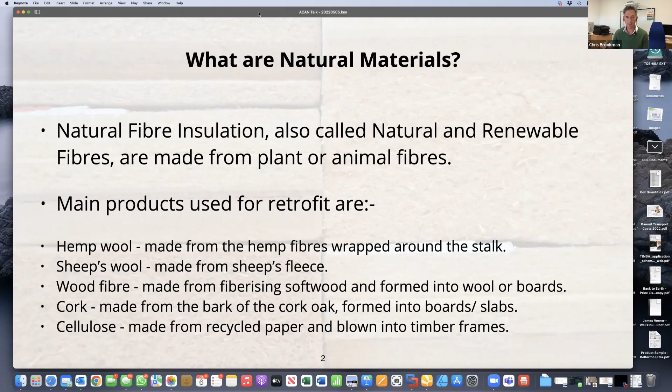The other one is cork, which is quite popular, made from the bark of the cork oak. The last one you'll see fairly commonly is cellulose, made from recycled paper. So again, speaking to the converted slightly - why would you bother retrofitting insulation to your building? It is relatively expensive.

It produces quite a lot of disturbance, so you really do need to be motivated to do it. But basically in solid wall buildings, whether they're brick or stone or whatever, they're just generally cold. So at 11.5 months of the year, they are largely uncomfortable to be in. There are periods in the summer when they're actually really rather nice to be in, because it can be quite hot outside. But beyond that, most of the year it tends to be that they're rather uncomfortable.

Now, everything that we do inside homes produces moisture. So breathing, washing, cooking, showering, everything produces a lot of moisture. And when you've got cold masonry surfaces around you, you get condensation, and that condensation on a continuous level begins to form mold. The mold produces spores which go into the air, and that gets into your lungs and can have fairly serious impact on your health.

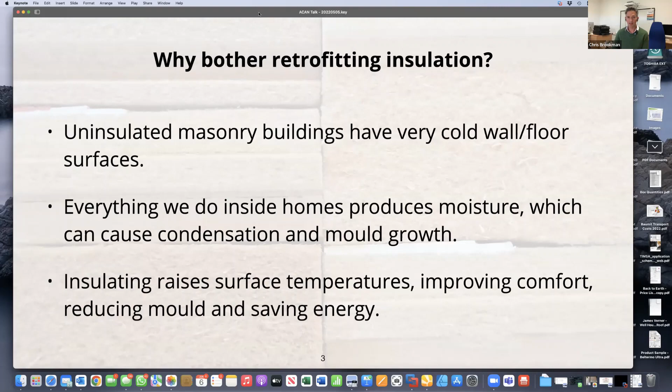So to alleviate that, you can apply a layer of insulation either on the outside or the inside, but I am primarily going to talk about internal insulation. By doing that, you're raising the surface temperature of your walls, or whichever surface it is you're insulating. That prevents mold growing because the temperature is higher and the surface is drier. And then obviously by insulating, you're saving energy as well. So there's a lot to do with comfort, health, and energy saving. Although the energy saving possibly is the most difficult sell, because the payback period on a lot of this stuff tends to be fairly long.

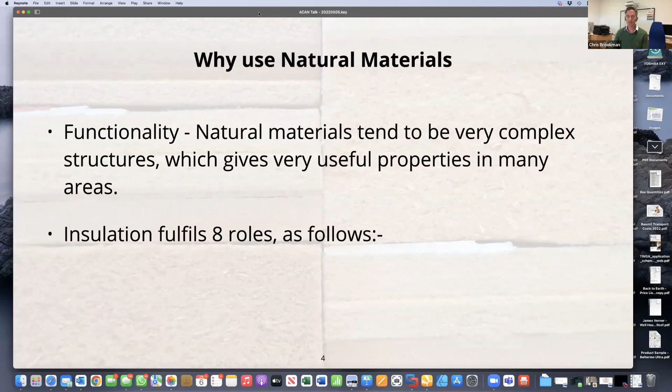So with all that said, why would you specifically use natural materials? Well, in plants, a lot of these fibers are transporting moisture. They're absorbing and releasing water and other nutrients. So they tend to be incredibly complex structures, and it gives them incredible properties that are really, really useful in insulation, particularly when you're insulating up against masonry.

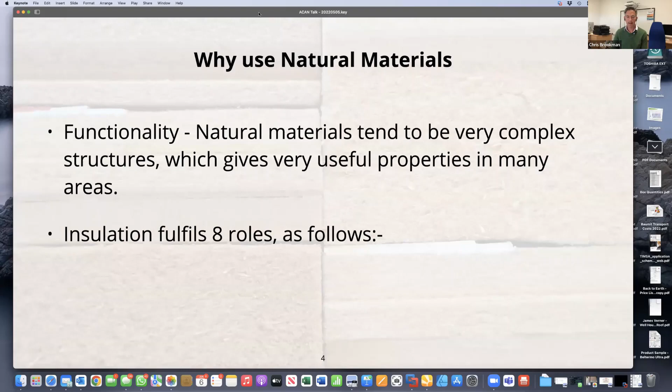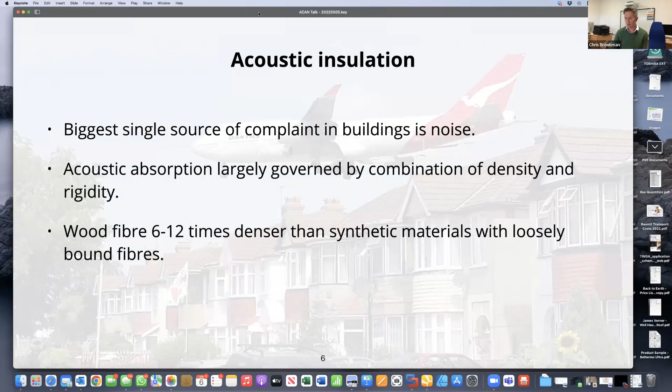I'm just going to very quickly whip through the different roles that insulation fulfills, and explain why these sort of products do particularly well. Starting with acoustic insulation, it's one of the largely forgotten ones, certainly in a lot of new build properties. Because these fibers are very dense, they tend to absorb sound extremely well, and typically would be about 6 to 12 times better at absorbing sound than the equivalent synthetic fibers. So they're extremely capable at doing that.

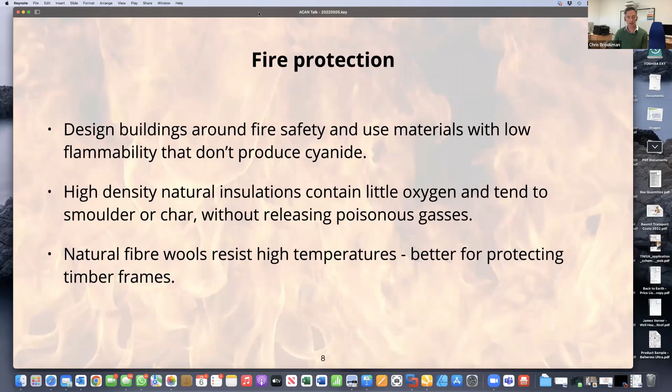Fire is obviously a pretty big topic. The nice thing about these fibers is they will very slowly burn in a fire, but what tends to happen is the surface chars and they burn very, very slowly. They also don't release cyanide or hydrogen chloride gas, both of which are pretty likely to kill you before you get out of the building. So although these materials will slowly burn in a fire, they're not going to kill you before they let you out of the building, which is actually arguably better than the alternative.

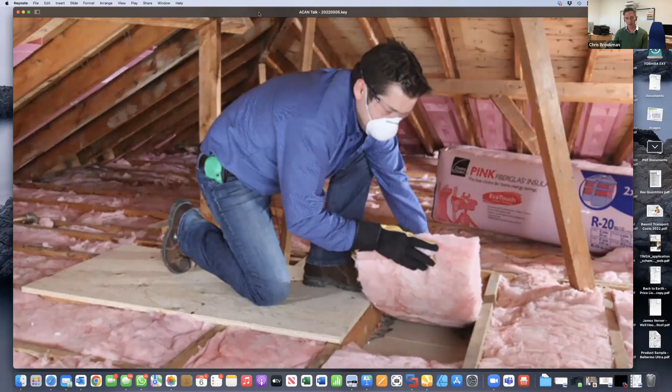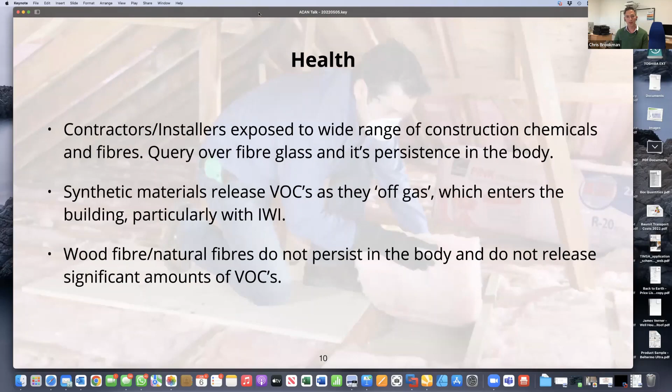Health of occupants and installers: a lot of synthetic materials contain lots of different chemicals, binders and other materials that were used to actually produce the product. They off-gas and release a lot of volatile organic compounds when they're in situ, but also they expose the installers to a whole range of chemicals and particulates like glass fibers or mineral fibers. And there are impacts to getting these kind of products in your body. So, they're basically not particularly good for you.

Comfort: again, natural fibers tend to be very, very slow at changing temperature. So you can get very lightweight insulation and it'll insulate the building and give you this incredibly low U value on paper. But in practice, they tend to create buildings which change temperature very quickly and aren't particularly comfortable. Whereas the natural fibers are very slow to change temperature, and that gives you a much greater level of comfort.

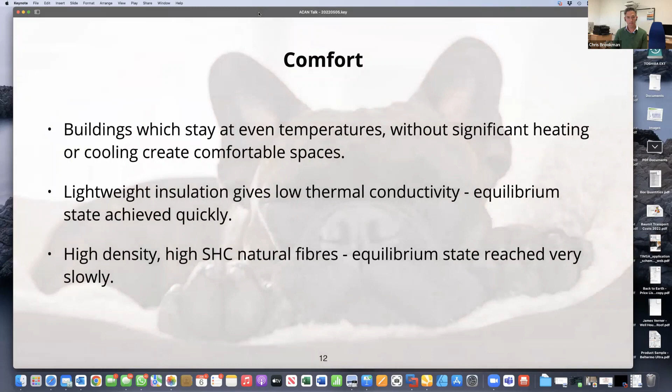This is not something you want your builder to be doing. So in terms of buildability, again, with natural fibers, they tend to be very simple. The detailing is extremely simple. You don't get shrinkage, you don't get off-gassing and changes in the structure and slumping and all these kind of issues that have dogged synthetic materials for some time. And again, you don't get this big difference in what's called the performance gap - the difference between the design energy consumption and the in-use energy consumption. That really is a big issue currently for a lot of modern buildings.

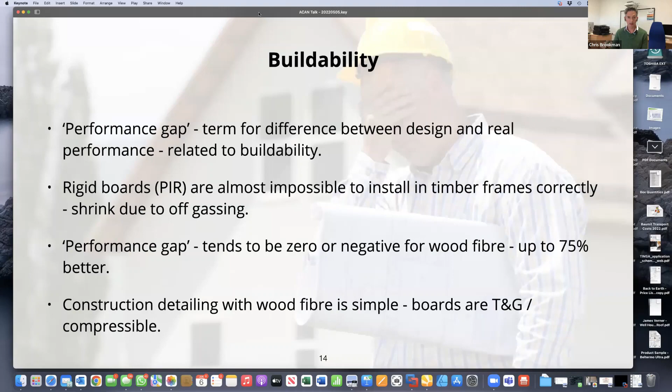Durability: anyone who's ever built anything will know that it rains a lot in England, and anything you put up tends to get soaking wet, even though it may well have started off lovely and dry. Again, these fibers are fantastic at soaking up moisture, transporting it, and letting it evaporate out quicker than pretty much anything else. So whilst you may think on the surface that they're going to rot or fall apart, they're actually incredibly useful in construction because they do allow buildings to dry out. So many buildings do contain vapor barriers or barriers to moisture movement, which actually massively impedes their drying out.

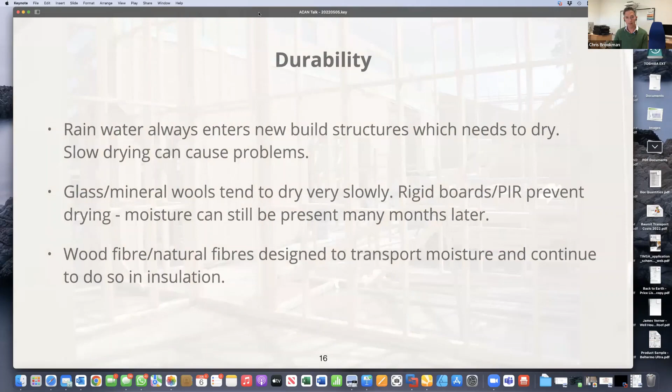Sustainability. As I said earlier, these are largely waste materials. The great thing about them is that they are absorbing carbon as they're growing, so by using these kind of products, you're actually locking up CO2 into your building and reducing the carbon in the air right now. Things like Passive House are a great standard, but only if you're using low embodied energy materials, because if you build a Passive House out of concrete, steel and polystyrene, the amount of energy it's producing takes a hell of a long time to offset against the running of the building. So it's really important that you use very low carbon or carbon negative materials like these.

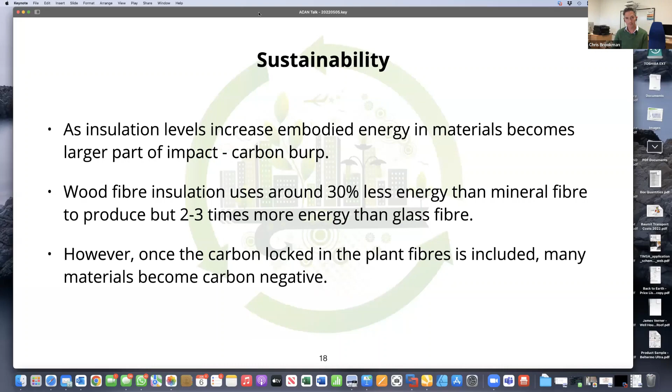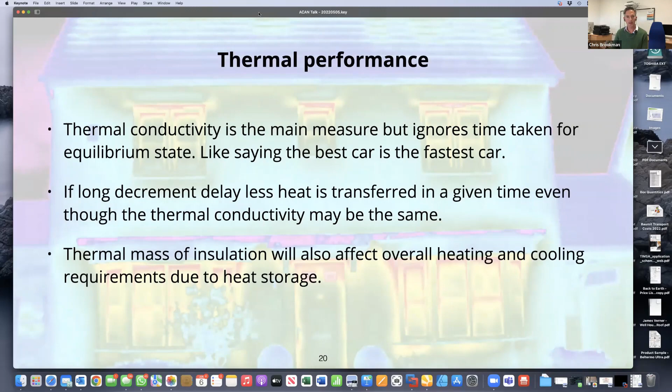And then finally, thermal performance. Again, overall heat loss is not just a measure of how low the conductivity of the insulation is. Very low conductivity insulation doesn't guarantee very low heat loss. Overall heat loss is affected by other parameters, including the speed that heat moves through an insulation material. Natural fibers tend to take a long time to change temperature, and it takes a long time for heat to move through them, even though their conductivity, once they reach equilibrium, may not be as good as PIR, for example.

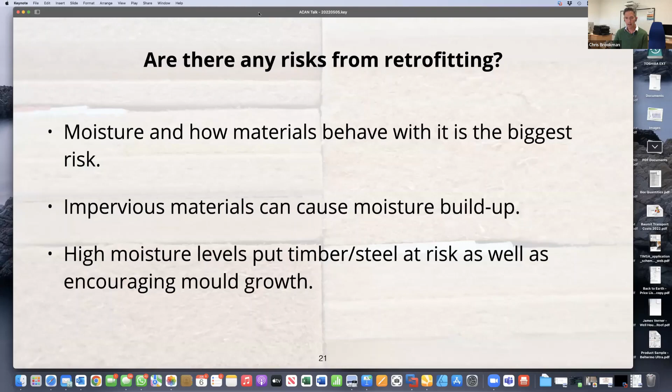So are there risks from retrofitting? Yes, there are, and it's largely around moisture. The materials you use have got to be able to accommodate moisture flow. Using impervious materials, particularly against historic buildings, causes the slow rise of moisture in the walls. And particularly when you've got timber, which nearly all historic buildings have in the walls, joists, beams, lintels, wall plates, whatever, if you raise the moisture content of the wall, you inevitably begin to rot the timber bedded in it. So it's really important to use vapor permeable materials, but also materials that are hygroscopic and can transport moisture as well.

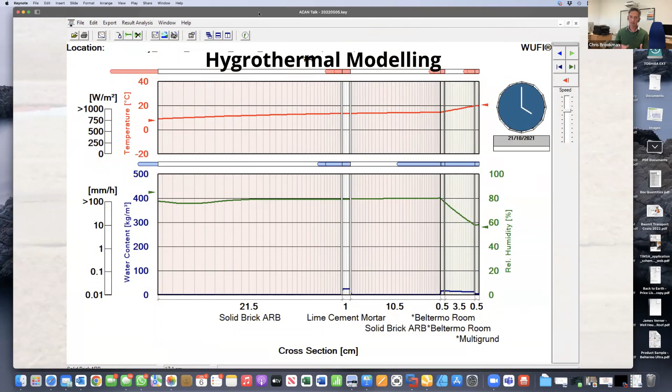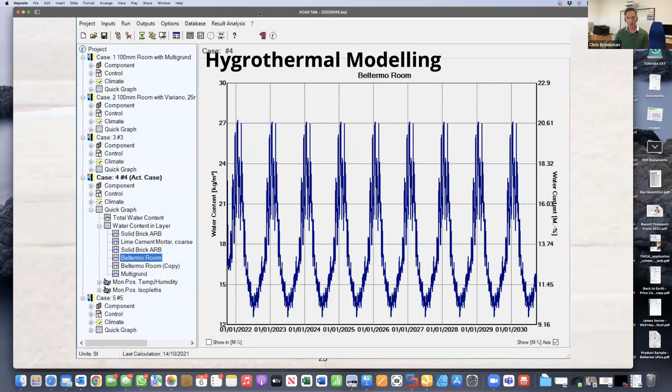So when we're creating specifications, we use some software called WUFI, a German derivation. It basically shows you the heat and moisture flow through sections of walling. Using that software, we can look at various different layers within the wall, fairly specific layers, and see what the moisture content is at any point, just to make sure that what we're designing isn't going to cause problems 10, 15, 20 years down the line.

So moving on to insulation, is internal or external insulation better? We get asked this all the time, but particularly with older buildings, it tends to be less easy to insulate externally in terms of visual appearance, planning, or listed building consent, or other issues you may come across, particularly on terraced buildings or the like. But basically, masonry absorbs a lot of infrared radiation, so even at 21 degrees, if you touch masonry, because it's so conductive and heat absorbing, and our skin is at 30-35 degrees, it will always feel cold.

Internal insulation isolates you from that, and actually, thickness for thickness, you will get roughly twice the boost in comfort using internal insulation than external insulation. And if we look at comfort, not just U values and not just targets, but actual comfort, that outlook gives you much greater resource efficiency.

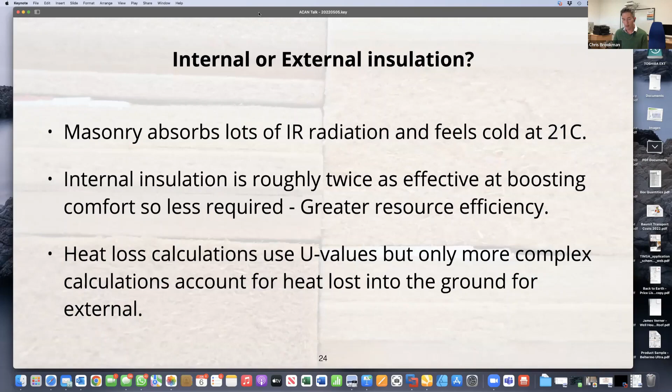All of these natural materials, any material, has a limited resource. We can keep growing it, but only at a certain rate, so it's still important to use these materials efficiently. The other thing is that basic heat loss calculators, when looking at the heat loss through your walls, tend not to include the heat loss that goes down into the ground when you're using external insulation. There is quite a significant amount of heat that goes down into the ground when you insulate externally. With internal insulation you don't get that, because you're insulating the wall before the heat gets to it. So there are generally a lot of benefits to using internal insulation.

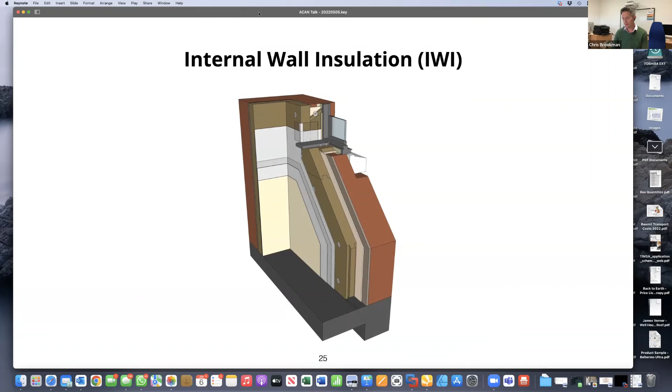In terms of what that might look like, this is a bit of a schematic. The reddy browny bit would be the equivalent of a brick wall. There tends to be a leveling coat plaster that goes on the inside. In this case, we're talking about wood fibre insulation, so that would be pressed up against that, and then you'd have a lime plaster up on the surface of that.

The process you go through is essentially you get heat and moisture. Whenever you've got heat movement, you also get moisture movement. So during the winter months, you've got this flow of heat into the wall and moisture with it, and you do get condensation at the interface between the two.

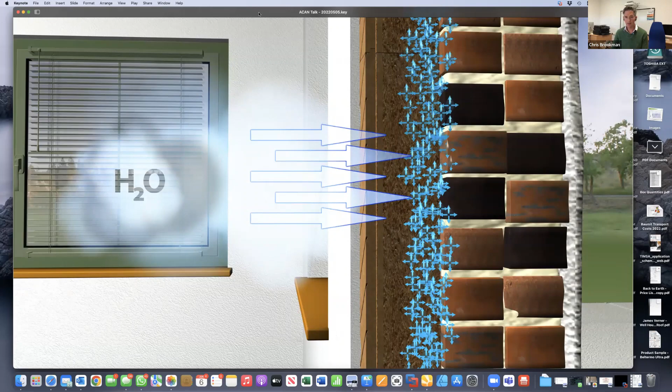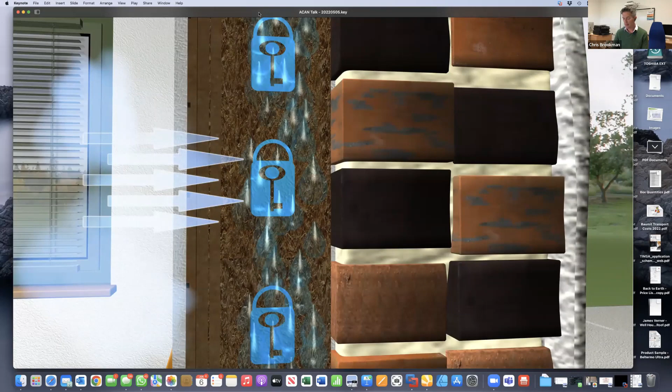But materials like wood fibre and, to some extent, cork will lock up that moisture normally during the winter months. Some of that will be in the wood fibre, some in the brick. Then as the weather warms up, you get a huge increase in drying potential, so some moisture is drawn outwards, and some dries back towards the interior of the room. Typically by June or July, all the moisture accumulated during winter has dried out, and you're back to your base state. That's an annual process that goes on year after year.

When we're designing the property specification, so long as the moisture level doesn't rise above a certain extent, this can go on indefinitely, essentially.

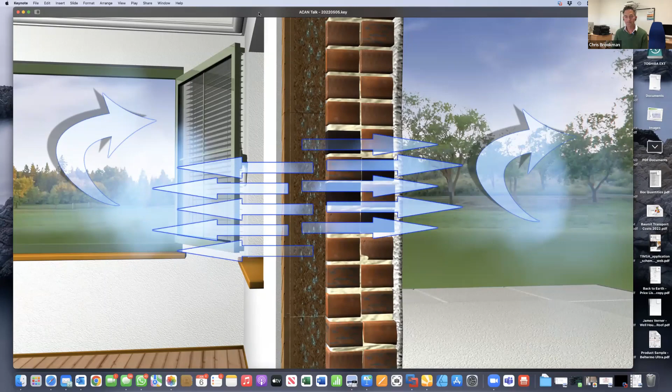What that might look like would be something like this. If you had a brick wall, we tend to use a clay base coat on the wall first, because clay actually buffers moisture much more effectively than lime, gives you much better longevity, and reduces the risk on the wood fibre boards. You'd have a lime plaster over that, and then decorate as normal.

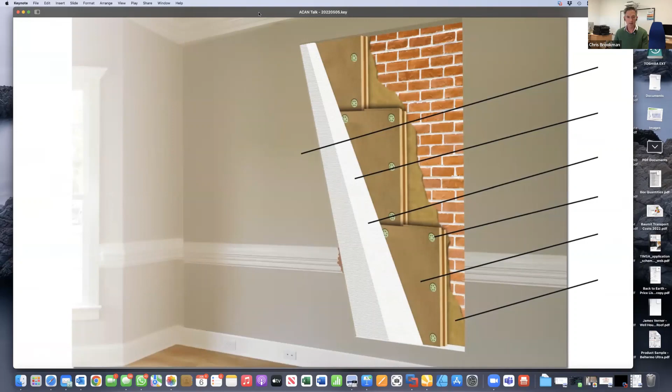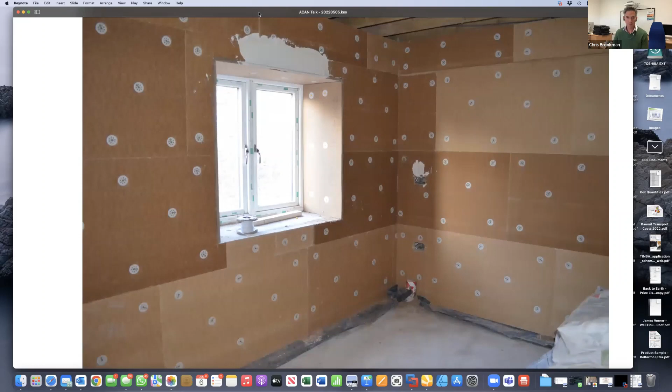The wood fibre boards were fixed to the wall. We use these big mushroom-headed screws that screw it back to the wall after the levelling coat has gone on. The one thing you've got to do, it's fairly obvious, is know where you need to insulate when insulating the inside of your external walls.

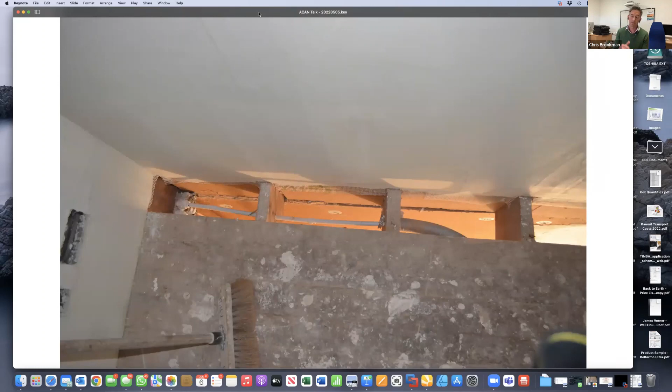The one bit a lot of people forget is the zone around the first floor. It's absolutely critical that you bring your insulation up the wall, cut your ceiling back and your floorboards back, and carry that insulation on through the floor zone, so you don't get condensation around your joist ends, and you don't run the risk of rotting out your floor.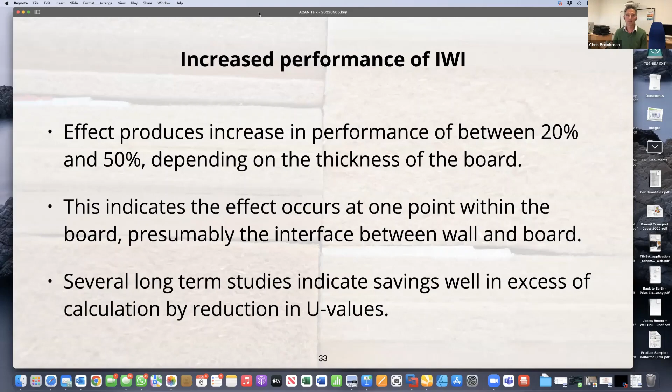There's one other very strange property you get with wood fibre, which is another reason we tend not to push people to go way below a U value of 0.3. You get an increase in performance between the theoretical U value and the as-measured in-situ U value. So if your theoretical U value was 0.35, when you actually measure it in situ, you'll probably come in at the high 0.2s. That's something to do with the way water is switching between vapor and liquid in the structure of these fibers, and weirdly it does give you an improvement in U value. I've never really found anyone that can satisfactorily describe it, but that's roughly what's going on.

Finally, this is where we get onto the ASBP, so we'll talk a little bit about them now. The ASBP is an organisation that brings in a lot of small distributors and manufacturers, much like ourselves, brings them all together, and magnifies the impetus behind these companies to be able to affect government legislation and affect the market as a whole.

They carry out work with a certain amount of contact with government, not exactly education, but showing them what is possible with natural fibre materials rather than always using standard synthetic materials. They bring in all these different companies, and there is a vetting process - it's not just a case of coming in and paying the subscription fee. There is a barrier to entry, but they're a really useful organisation.

They bring in a lot of technical information, creating a one-stop hub for architects, homeowners, and lots of different people to get reasonably impartial information. It's not just sales nonsense - there's an awful lot of proper peer-reviewed research which actually guides the direction of the organisation.

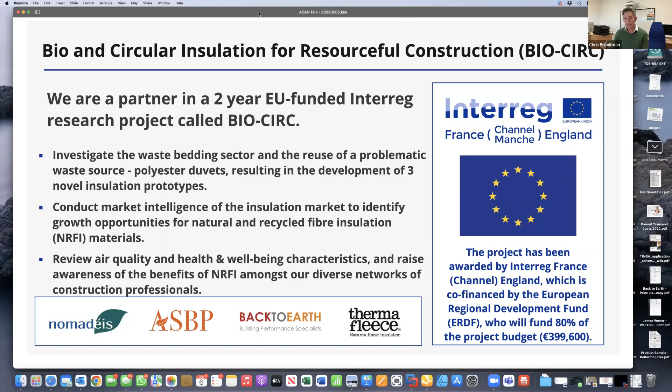I think that's it - sorry, I probably went on a bit long there. Thanks, Chris. I should have introduced you to start with, but thank you for putting your name and company name at the end.

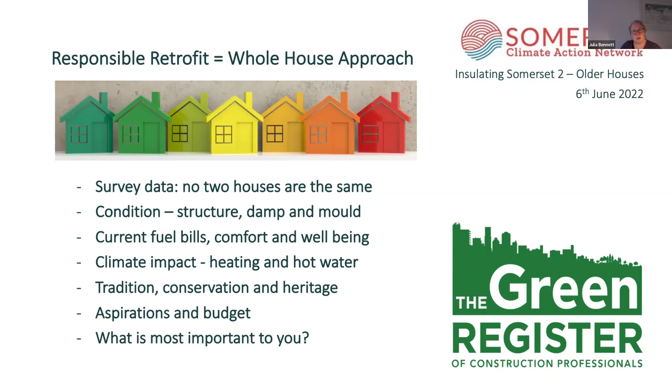And then you all have aspirations about your properties, and you all have constrained budgets. So one of the other elements of a whole house approach is actually working out what are the top priorities for you. It's not easy making the decisions.

So we talk about a whole house plan. Even if you've only got a small budget, you still look at the whole house and try and assess what would be the most appropriate things to do that would improve the comfort, reduce your bills, and not cause damage to the property.

As an architect, when I'm doing retrofit projects, I trained in Passive House and EnerPHit. So I actually use energy modeling. I do a model of the baseline house, and then I model options of what the different retrofit measures would do to your bills, your energy demand, and your ventilation rates. So there are ways that you can technically work out what the benefits are of different retrofit options.

But the one thing that Wolfgang Feist always used to say when he was talking about the Passive House retrofit model is, any element that you touch, do it to the absolute best quality that you can. Because for things like window replacements, you'll probably never do that again if you're upgrading elements. So do the best you can rather than trying to spread everything very thinly, because you can do retrofit in phases - it just has to be carefully thought about.

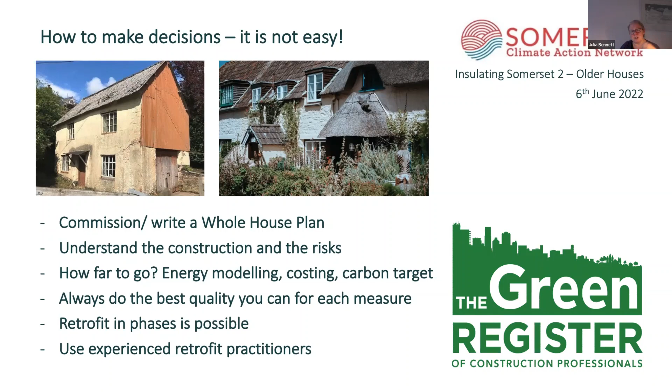And it's easy for me to write, use experienced retrofit practitioners, which we all know is the holy grail at the moment. Green Register is very involved in trying to train more and more practitioners, and I can talk about some of the ways that we do that later.

I'm sure you're familiar, houses lose heat from just about every pore. If you've seen any thermographic imaging, you'll have seen that around windows, doors, thresholds, junctions in the roof and everything else, all that lovely expensive heated air is just going out through air leakage. Chris mentioned air tightness and air leakage, and the fact that trickle vents are just holes in your house that you can't control, so they're not a positive thing in terms of carbon management.

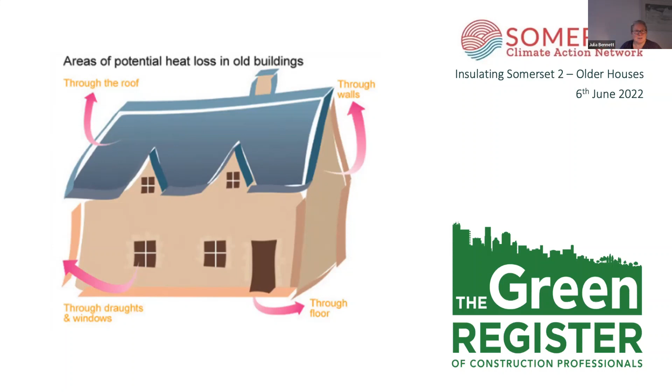Cara also put in the chat about STBA, the Sustainable Traditional Buildings Alliance. A number of years ago they created a guidance wheel, which you can go online and it's very interactive. What it helps you do, when we're talking about risk management, is look at, for example, what you might do to an open fireplace with a chimney, which obviously, if you're not using it all the time, is just another massive hole to the sky for your nice warm air to disappear up.

And how you assess the associated linkages to different other elements of the building - I'm not describing it very well, but it is interactive, and it's on this link, which Cara's also put in the chat. It's got lots of technical information behind it. So if you really want to understand what happens if you block up your chimney in relation to your ventilation requirements, or when you're putting in new windows, what impact that has on the reveals of the windows with internal wall insulation and things like that - it's a useful source of help in understanding the different options and their impacts.

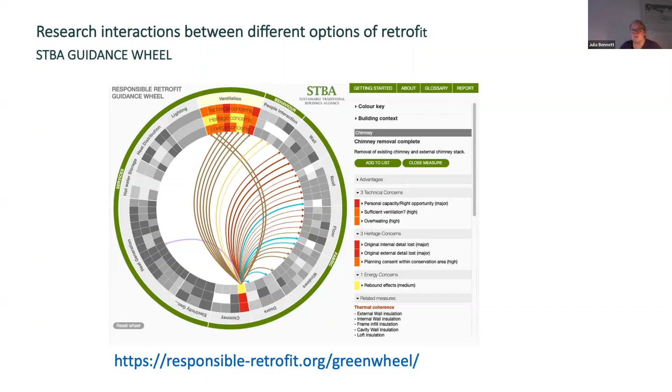Here we have a really interesting diagram of a solid walled house and the various elements involved. Excuse me, this is actually a rubble stone wall. We've got a nice open outside wall, pointed in lime, not cement. Cement mortar is actually very tricky - if you own older buildings, you'll know the stone tends to crack before the cement does, which is exactly what it shouldn't do. So if you're ever repointing an old building, use lime mortar if you can.

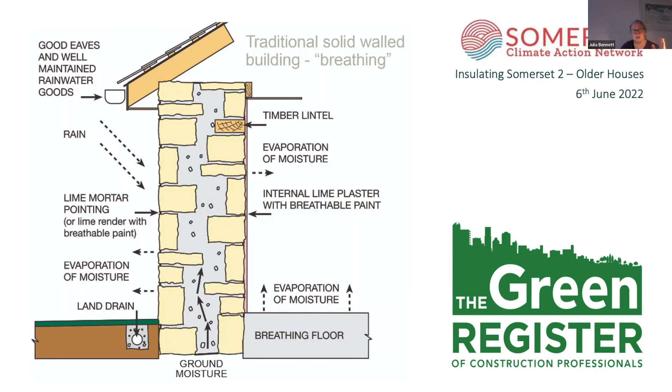It also enables that moisture progression that Chris was talking about. On the inside, we also want something that allows that moisture movement - that annual cycle of drying out. It doesn't matter if a wall's wet up to a point, because the annual cycle will dry it out internally and externally, as long as you've not got impervious materials. This is why the natural material side that Chris was talking about is so important, because the majority of natural materials enable that movement of moisture. And moisture, as Chris said, is critical in retrofit. You can do more damage by blocking in moisture on both sides of walls, roofs and floors than by accident, which is why you're having sessions like this.

So there we go - technical detailing is also very important, at the junctions between elements. Where roofs meet walls, where floors meet walls, where intermediate floors meet walls, where windows meet walls. You can see why we talk about walls a lot.

I think we understand perhaps that IWI is internal wall insulation, EWI is external wall insulation. Chris has taught this well - I'm just following on from you, Chris, really.

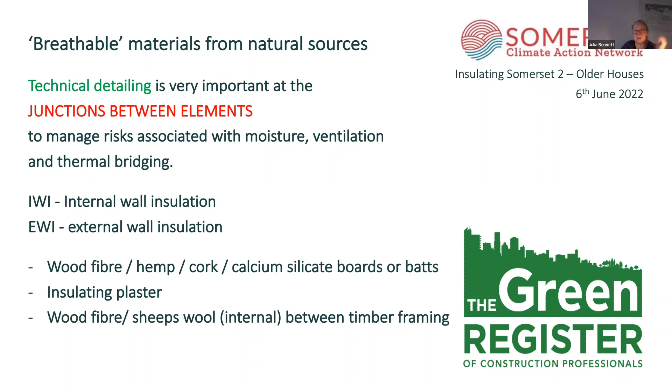Here are just a couple of images about how you might approach internal wall insulation. Chris did have a drawing of this, but these are actual images of it happening. You have to smooth up your walls and make a butter coat or a parge coat in order to be able to put products like the wood fibre boards. Another way of doing it is that you get to this stage and then put timber battens and fit the boards in between the timber. So there's no single right way - there are lots of wrong ways, but no one correct method.

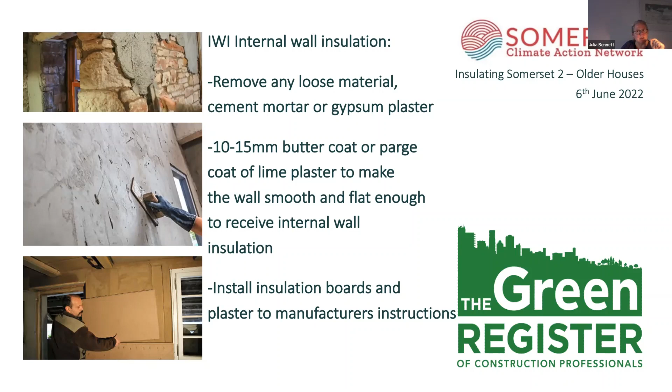That was just to give you a bit of a visual understanding of the layers that go into it. On top of the boards in that bottom photograph, you would ideally apply lime plaster, because of that moisture migration we're talking about. Gypsum plaster doesn't really allow moisture to move in the same way - it's much cheaper, but it's not necessarily the right thing for older houses.

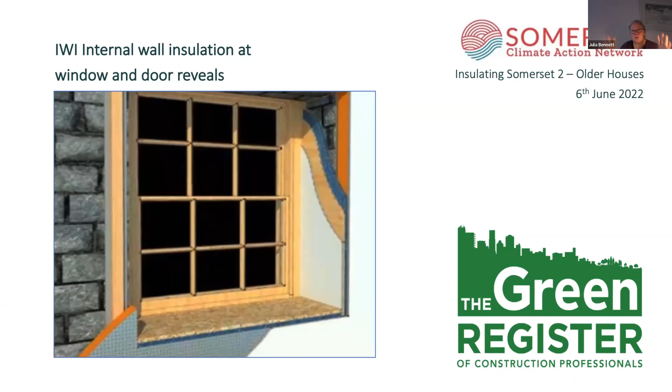One of the other critical elements - if you've got windows like these ones that look like original sash windows, they're probably single glazed, and if it's a listed building you might not be allowed to do anything with it. You've still got the internal insulation going into the reveal, and you must insulate the reveal, because if you do ever come to replace the windows, you want the whole lot to be the best it can possibly be in terms of saving that heat.

This is just a couple of images from - I want to say Mike Y, but I think it might be Tŷ-Mawr - there are specialist suppliers like Chris and everyone else. This one is a really useful comparison of the different thicknesses you would need.

At the top of each image, I hope you can see the solid wall is being calculated as having a U value - that's a measure of how much heat is going through a meter square, at 1.64. You can drop that down, and down is good with a U value, since it measures how much heat is passing through. We want that to be the lowest number it can be - we can get right down to 0.32.

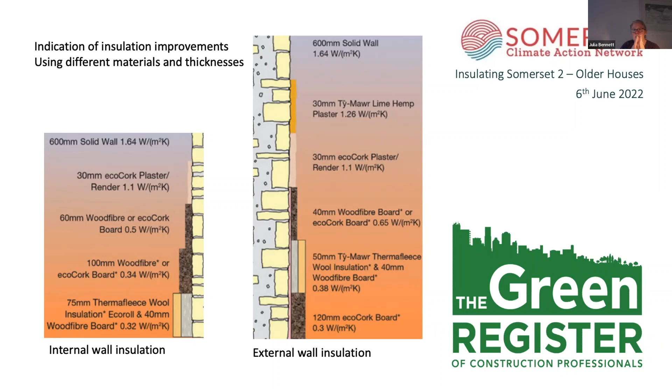If you use materials like Chris mentioned, off the shelf, like Kingspan and Celotex - they're called PIR, polyisocyanurate insulation - you can get much lower U values, but they're closed cell materials and don't have any give in them. So you end up with gaps between the boards, and it's very difficult to get continuous insulation.

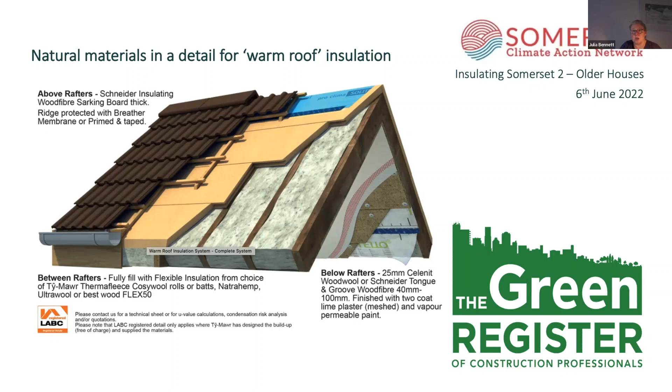Similarly, for roof construction, getting everything right - you can see how beautifully that is drawn, that the insulation is absolutely perfect up against those historic timber rafters. But there are specific sequences, and ventilation of roof spaces and insulation is something that you would need to read up on or ask an expert.

Timber suspended floors - I'm going to show you a slide in a minute of an intermediate floor, so a first floor, but it's quite tricky because you end up...

There aren't any ways of insulating suspended ground floors without taking up the floorboards that I feel really confident in, and that's my personal experience - that's not what anybody else might say. So it's very difficult, but the right way to do it is to actually create little nests of airtight membrane for the insulation to sit in. You can't just drop it in and hope for the best, because you end up with a lot of air leakage around the edge.

I'm actually working on a property now where the clients have done this, but not well. We've just done air tightness testing and thermography, and it's just leaking like a sieve, and it's very sad because they're not going to lift the floors again. So that brings me back to the point of always do it to the best of your ability.

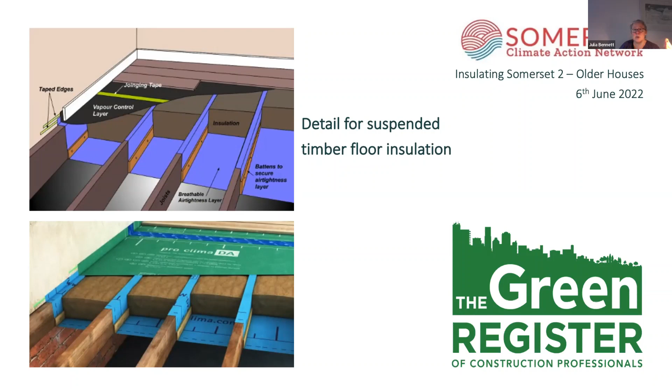And Chris showed the more acceptable, probably more common detail of where you actually insulate very carefully and make sure that you've got that insulation tucked between the joists.

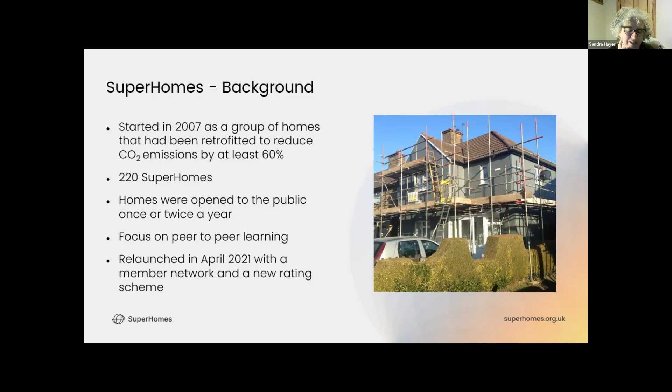We actually ran out of funding for the project because it was very resource intensive having the open days, but we decided to invest in it ourselves, and we relaunched in April last year with a new rating scheme.

If you become a member, you can come to our events, which we hold monthly for individuals. We've had ones on things like 'is a heat pump right for my home?' We also have regular events where you can ask some of our original super homers, who are part of the original project and who we now call our pioneers, about their experience of retrofit. We also have member-only forums, meetings, and a monthly newsletter.

I suppose what I'd say about the rating scheme, given everything that's been said about retrofit and what can and can't be achieved, is that it's a way of having recognition of what you've actually managed to achieve with your retrofit. So it measures outcomes. When we had the original SuperHomes, it was very much based on making a 60% carbon saving from when you moved into the property.

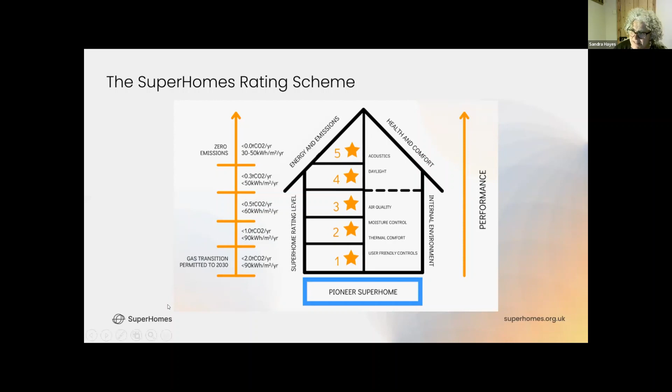My next slide sets out in a bit more detail - and I appreciate it's probably quite difficult to read here - the parameters of what we're looking for in terms of thermal comfort and moisture levels, and how much variation will be acceptable over a period of a year. But happy for the slides to be shared afterwards.

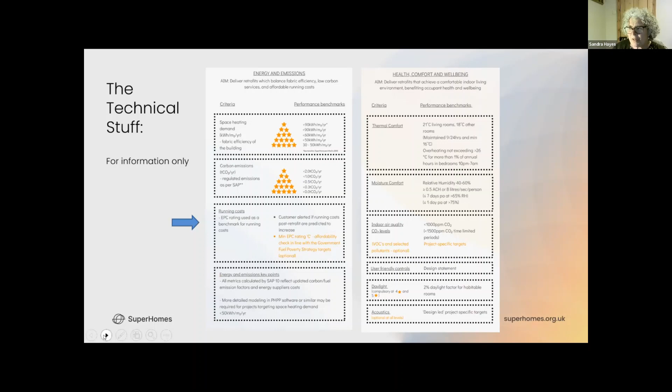So the customer journey that we recommend follows the PAS 2030 and 35 route, and as has already been said, what's really key is getting that whole house retrofit plan, or whole house audit.

So that doesn't necessarily have to be part of the SuperHomes customer journey. You could seek to become a Super Home at the point where you've already done your retrofit, but we, along with the other speakers, recognise that getting advice from a professional retrofit coordinator at the beginning is really key to making sure that mistakes aren't made at the very beginning.

So the customer journey is really that you become a member of the SuperHomes network, and the customer can either find a retrofit coordinator themselves from the Trustmark website, or we will try to help them find one. We also recommend, although it's not compulsory, getting a design stage Super Home assessment done. This is carried out by the retrofit coordinator, who we've given additional training to, and it will tell you what we anticipate your SuperHomes rating would be if you did the measures selected in your whole house retrofit plan.

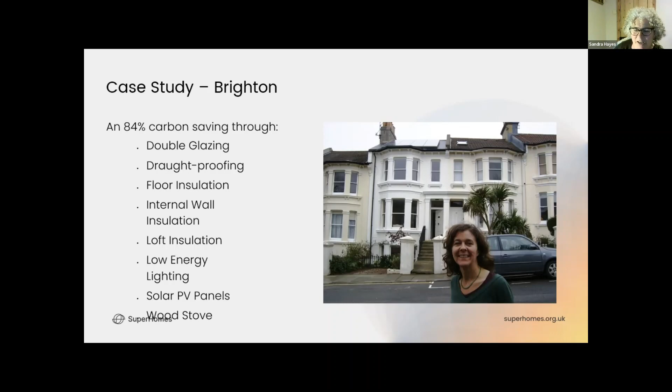So I've gone down the route of putting in some secondary glazing, which is pretty good, but I know it's not as good as if I could put in proper double glazing. So I think that's it.